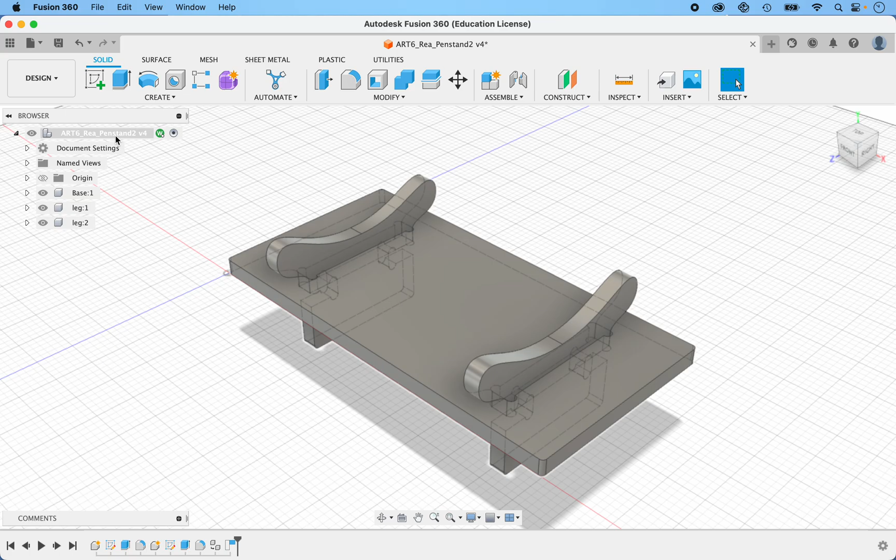these notches. So verify that the top of the browser tree is active. There's the radio button clicked. We will right click on the top of the tree for new component and label this bracket.

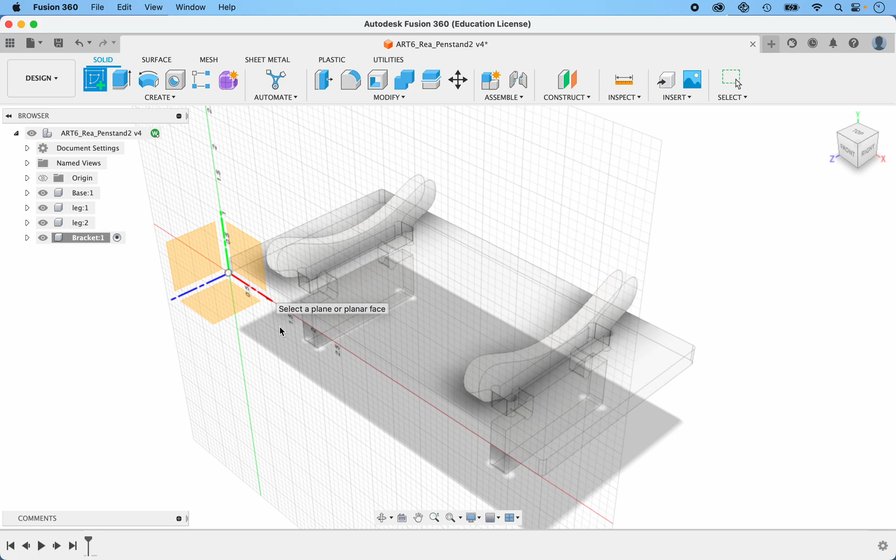With the bracket layer active, let's create a sketch and let's create it on a plane where the bracket will be placed. So I'm turning so I can carefully select that flat face, and I want to orient this so the top is up so we don't get so disoriented.

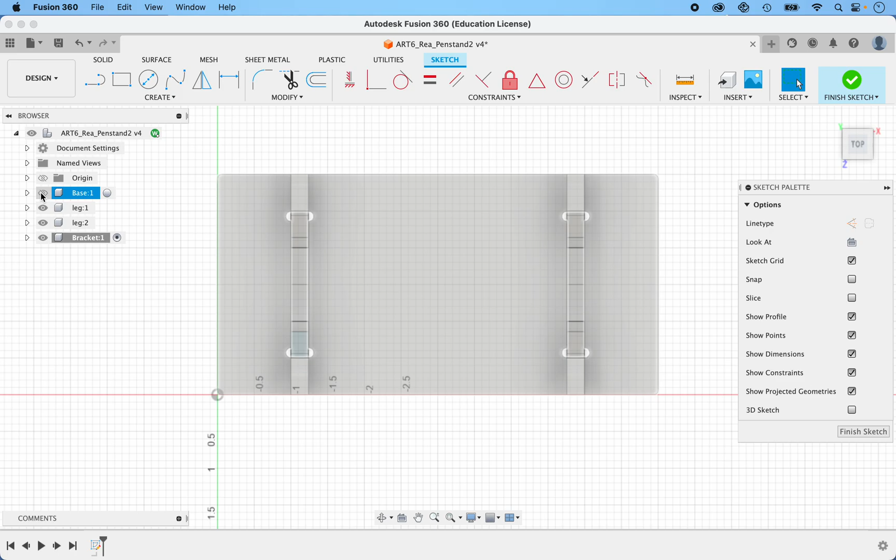And let's turn off the base and project, P for project, some points to help us in this sketch. So I'm going to go in here and get these 4 points that show the extent of the bracket. Let's do the same thing over here.

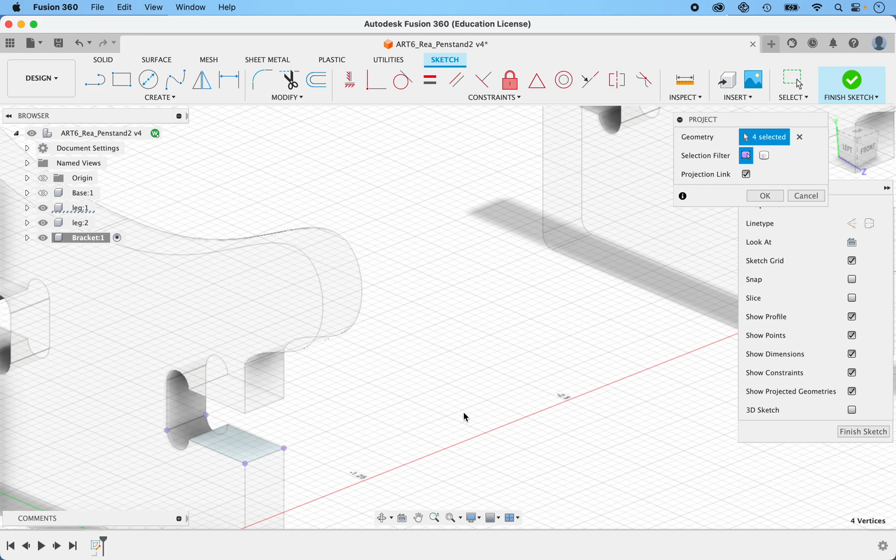And we'll click OK and click the top so that we are reoriented again to our sketch. And now we can turn off our legs. So we have 4 points to help us place our bracket accurately.

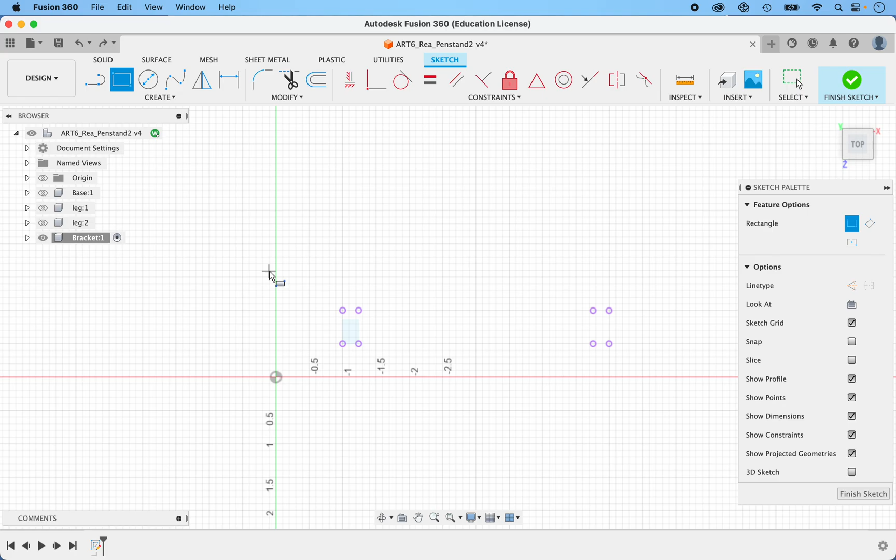So let's take our 2-point rectangle and do a very rough sketch of where we want our bracket to be. And we know we want it to be 5 inches long, and we want it to be 1 inch high, but we want it to be placed aligned with the bottom of the bracket.

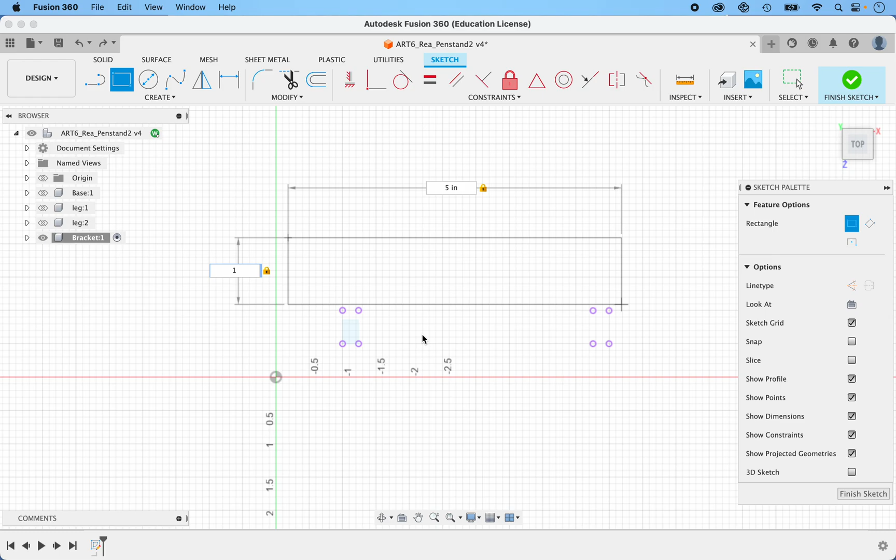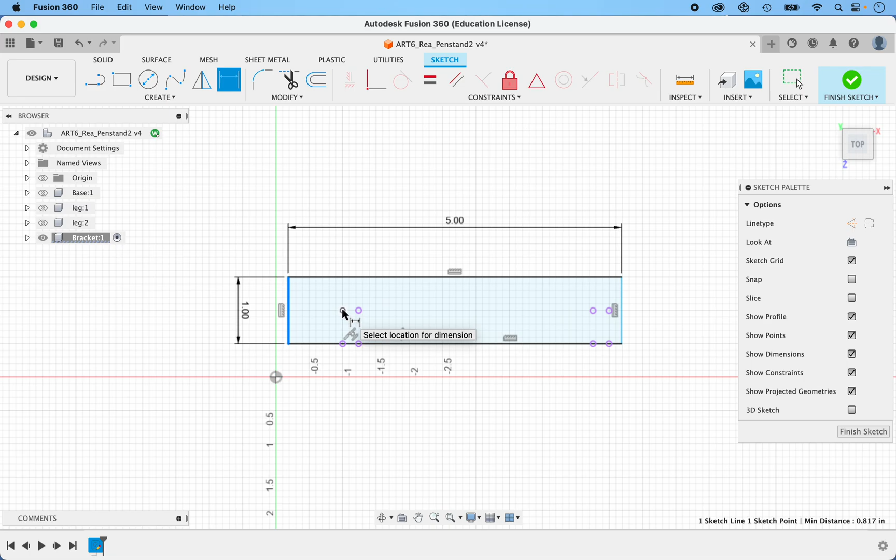So we'll take our collinear constraint, select the bottom of this bracket and align it there. And next we can use some dimensions to place it in relation to those points. I'm going to use D for dimension, and we want the distance from this edge to that point to be a 1/2 inch.

Now these purple dots show the notches that are open from below, and we want the bracket to slide in from the other side.

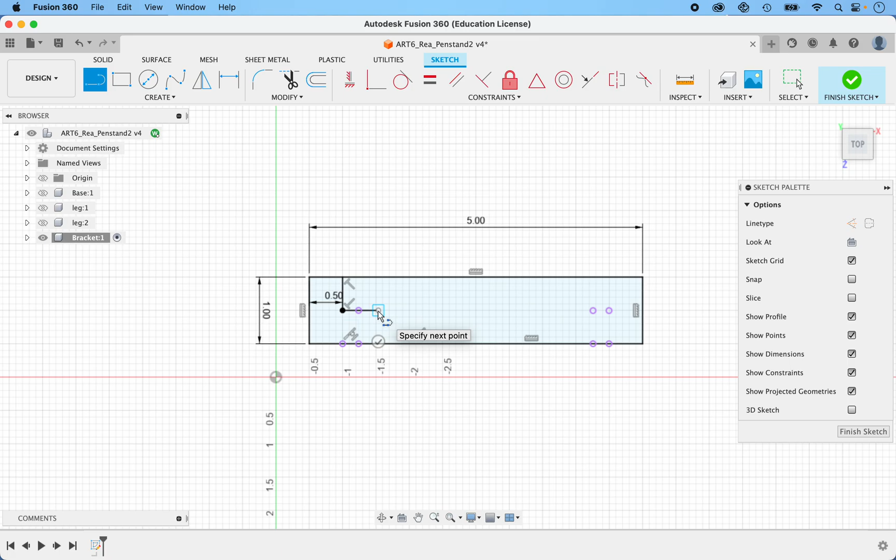So now we're going to use line, and we're going to make our lines start there at that point that we projected, and that can go up vertically, go back again, start here, and I'm going past that purple point because I'm going to want to define that with T-max plus clearance in a moment. One last line to go above.

All right, so let's dimension this. And this is going to be T-max plus clearance. Great, so that's positioned and it's got just a little bit of extra clearance. Rather than using the purple dot, we mathematically defined that.

Let's go ahead and do that one more time over here. We'll use line to start here and go vertically to the far edge. Line again, starting here, going past the point, clicking, and then going up to complete the notch. We'll use D for dimension, pull off the bottom here, and use T-max plus clearance.

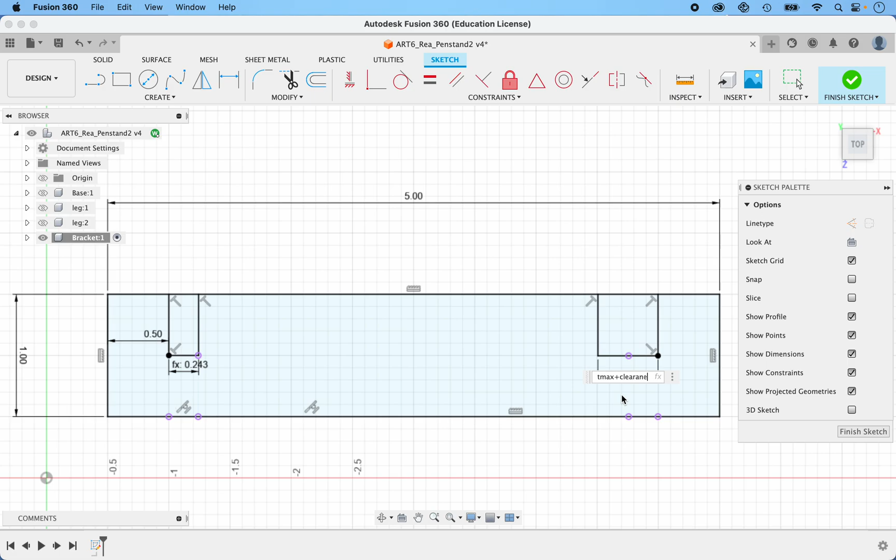Great. Now we have one of our brackets drawn, but we need another bracket. So let's give ourselves a line to mirror across, L for line. We want it to align with this top edge, so we'll hover here, pull out to the right, click, go all the way past the bracket in this direction. And let's escape, activate that line, X for construction, click away.

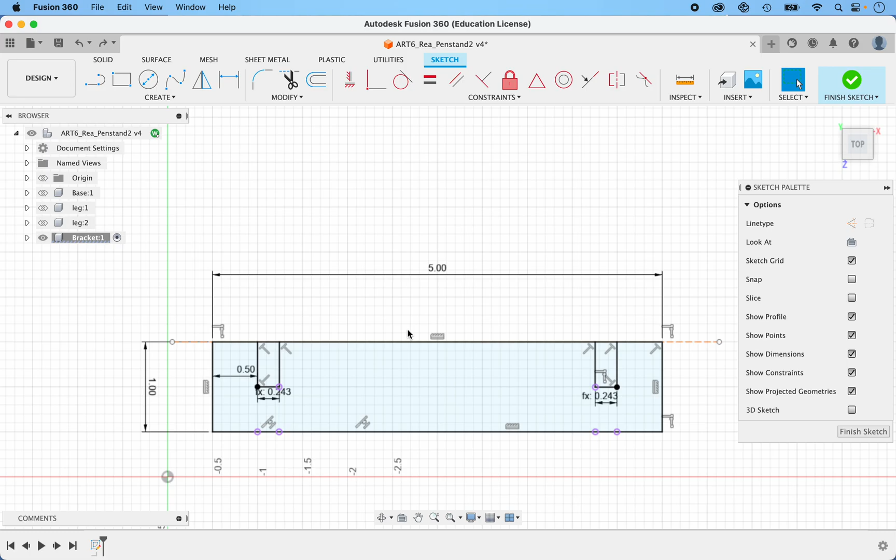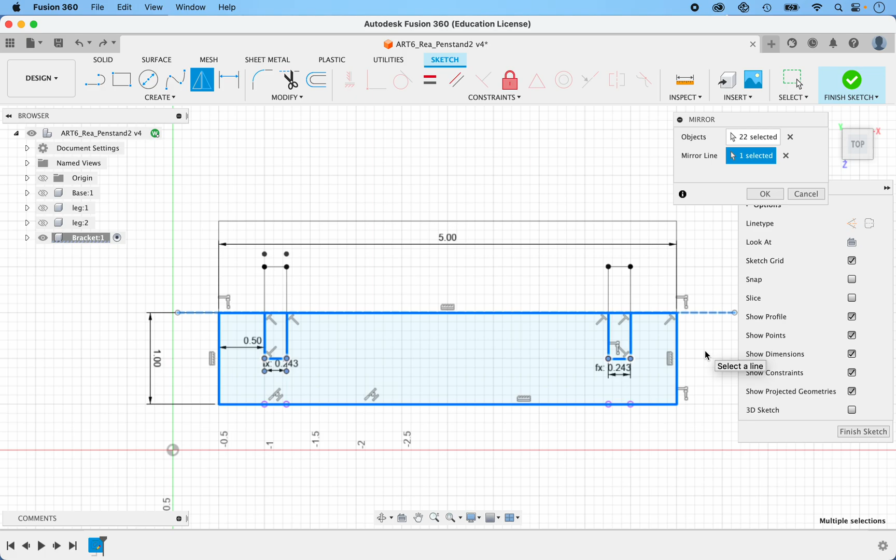Okay, so let's go ahead and mirror this. We'll take our mirror tool and we'll select everything inside here, plus this bottom line and the top line. And now for the mirror line, we'll click that, and now we have mirrored across. We'll hit return. We've mirrored across our brackets.

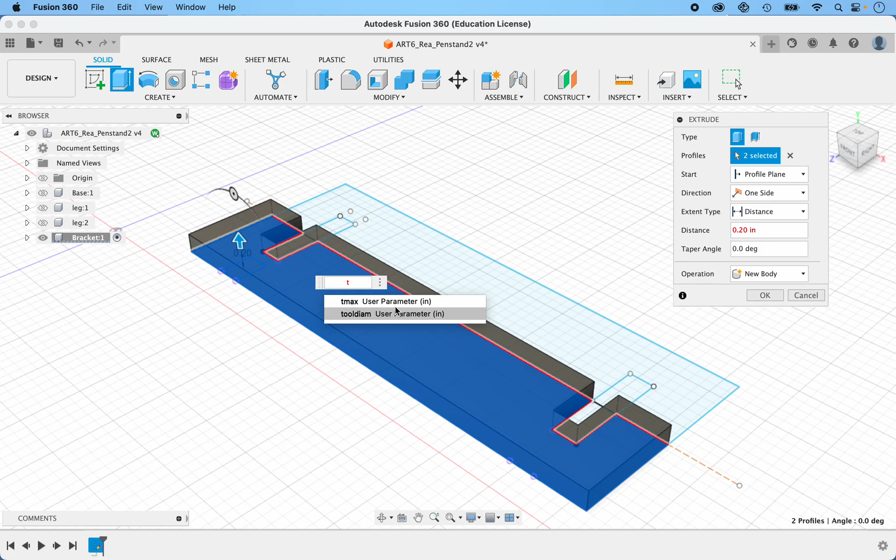Finish sketch, and let's select E for extrude, which is easier to see from home. So I'm going to hit the home button and we'll choose our first profile. So we want this all to extrude up by T-max. And let's extrude the other side again.

So once you've done one extrusion, the program thinks you don't need the sketch anymore. So we'll go down to the sketch level and turn the sketch back on. Hit E for extrude, hover over the profile we want, and extrude up.

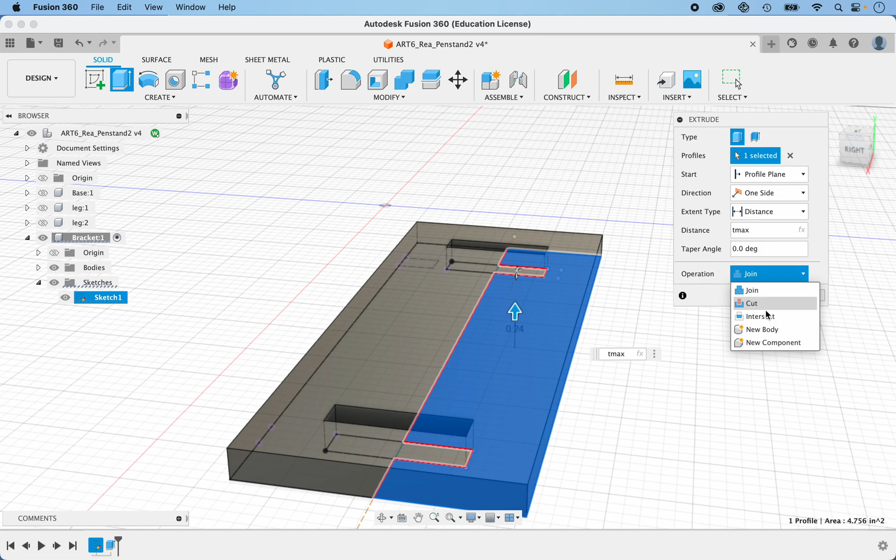And this is the key thing to notice here. Instead of join, which would make this volume join to that volume, let's choose new body. Excellent. So now when you expand bodies, you'll notice that you have two separate bodies off of this sketch.

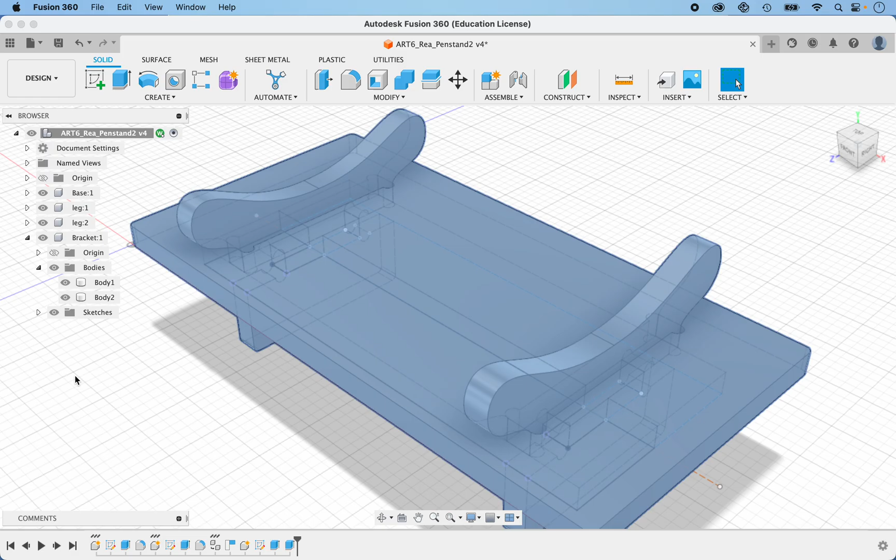We can go up to the top level and activate it and turn the parts back on. Now we have our entire pen stand modeled, and the next thing we'll be doing is learning how to lay these pieces out for manufacture.